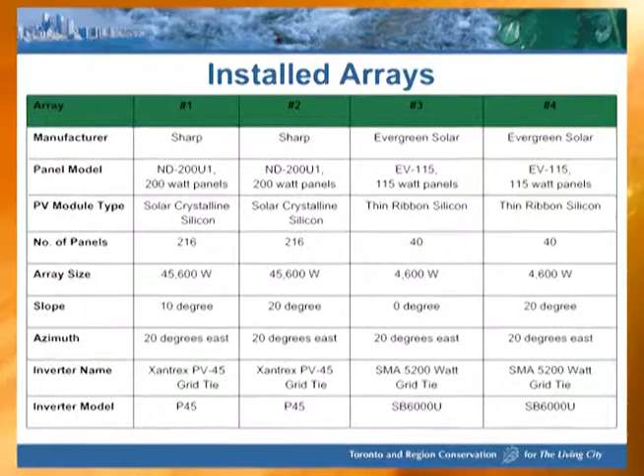This is a bit nerdy, but it's just showing that we've got 4 different systems there. And I would say systems number 1 and 2 are now a bit dated in that the inverters that were used on those do not have the kind of efficiencies that a modern inverter of that size would. However, systems 3 and 4, the inverters that were put on there are still state-of-the-art inverters. So as we go through, I'll tend to look at numbers 3 and 4 a little bit more than the first ones.

So if we look at the yields, this is the standard way that I like to look at what a system produces: the number of kilowatt hours per installed kilowatt. And this then equalizes all different kinds of systems, all different sizes of systems, together into one unit that you can look at. And so the round number that I always tell people is 1,000 kilowatt hours per kilowatt installed. And there you can see why I'm saying those numbers.

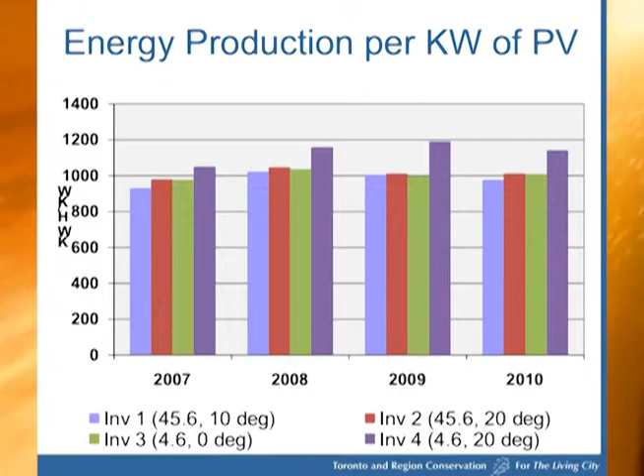Now, inverters 1 and 2, you can see they perform a little bit lower than the others, and that's basically the inverter. And you're not going to be buying that inverter now, so maybe look at systems 3 and 4. And system 3, you can see, is still bumping in a little bit below 1,000 kilowatt hours per kilowatt per year. But it's a 0-degree array. So that's as bad as it gets, basically. Generally, we tilt them up.

However, we have to remember that the fuel is free here. So efficiency isn't necessarily top dog, right? It's cost effectiveness. So if you've got a building that has zero capacity as far as weight goes to carry an array on the roof, now you have to build a superstructure over the roof. So this is, again, the Loyalty 1 example. And if you look at the cost of that superstructure to tilt the modules rather than mount them flat, it may not be the most cost-effective way of installing the system.

So this is where you're basically relying on a proponent that's coming to you and saying, we'll design a system for your roof. That's part of the little dance that they have to do: well, do we put in more? As soon as you go into an angle, now your dynamic loading on the roof happens. The modules start looking like snow fences, so they can increase snow accumulation compared to an array that's flat.

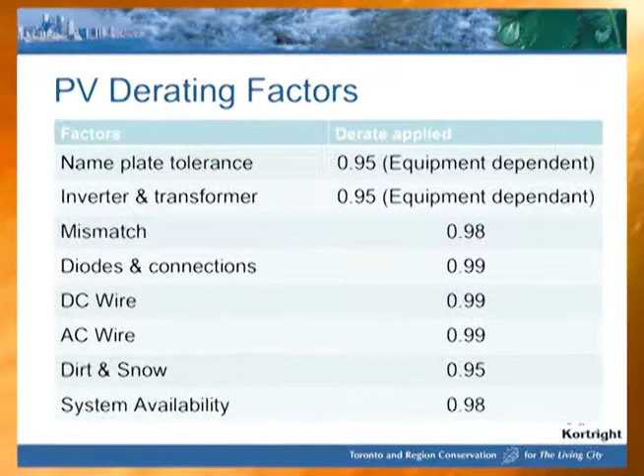So that 17%, where does that come from? If we break that 17% down, there's a nameplate tolerance. Let's say you buy a module that's 100 watts, plus or minus 5. So some of them are going to be minus 5. And the way arrays work is if you put a 95 watt module in series with a 100 watt module that's actually 100 watts, they both act like 95. And then if we put those in series with a +5, a 105 watt module, they all act like 95 watt modules. That's just the nature of the beast.

Typically on large arrays, we're putting somewhere between 6 and 10 modules in series. So you can pretty much bet that there's going to be one in that string at the bottom end of the tolerance. So you think the nameplate of the array is 100 kilowatts or whatever it is, knock 5% off there. Maybe you might get lucky and they're all +5, right? But that's not what I'd want to count on if I was trying to finance this.

The inverter and transformer, there's a bit of a loss there, changing your DC into AC. Mismatch, okay, and you kind of go, what's this guy going on about? These are 1%. That's 1% of your yield. So it's not just one small input. That means your output, what your revenue is based on, is going to be down 1%. And in the world of finance, that's a lot of money, right? So look, these are the elements that go into mismatch.

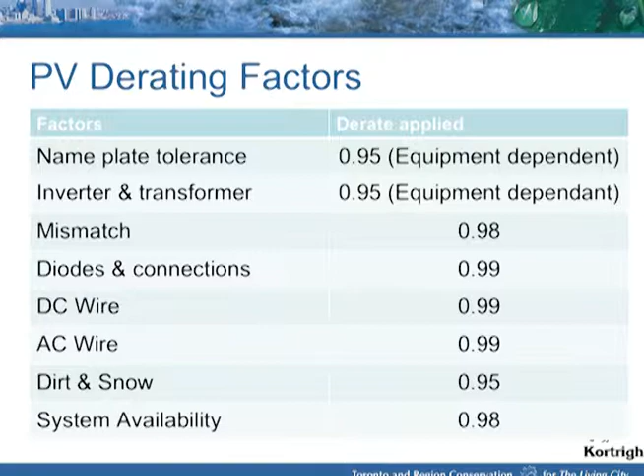Okay, they're both 100 watt modules, fine. But one of them has a power point of 50 volts, and the other one has its maximum power point of 51 volts. Well, they're both held at the same voltage. So again, we have this series element where we put all these modules together. Yes, they're both 100 watt modules, but it's at slightly different voltages. So that's where mismatch comes in.

Connections, the wiring, the AC and DC wire, and then we come into the dirt and snow. We put in 5% there. The one element to remember is the flash test is good as far as it goes. But what does the flash test measure in? Watts, right? It's a 100 watt module. What is your revenue based on? Watt hours, right? So a flash test is just that. That's how the module performs under a certain set of conditions.

So what we find is we could have, let's say, two 1 kilowatt STC, standard test condition, arrays. Their yields will vary plus or minus 5%. That's kind of the normal range between modules. So what that means is that different modules behave differently at different atmospheric conditions. So even though a standard test is 1,000 watts per square meter, 25 degrees C, at an air mass of 1.5 atmospheres, that's not where they live. They don't live on a test bench. They live on the roof of this building, which right now might be only receiving 200 watts.

Well, two modules that flash the same at 1,000 watts per square meter may perform differently at 200 watts per square meter. And so if you're in an environment, as we are, that has a lot of low light, then one module may perform better than another one overall on yield. Whereas as modules get hotter, their performance drops off. Let's say there's one that's very temperature tolerant, it's a great module to use in California. Whereas one that's slightly better at low light conditions is maybe the one that'll win in the market here.

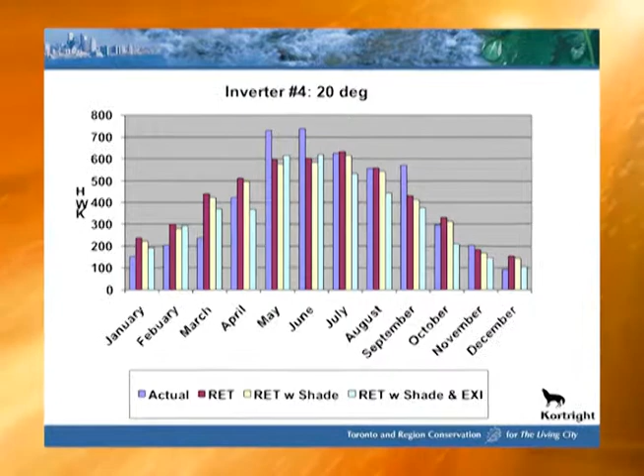So once people saw that, and I said, that's what I would have predicted for that system, they went, oh, okay, because up to that point they were beating themselves up, going, what's wrong with this system? But there it is. So you've got to have the right expectations going in, and that's where all this information about how our atmosphere matters, because those are all the inputs that we're looking for in these models. And that's how the different systems did over the year.

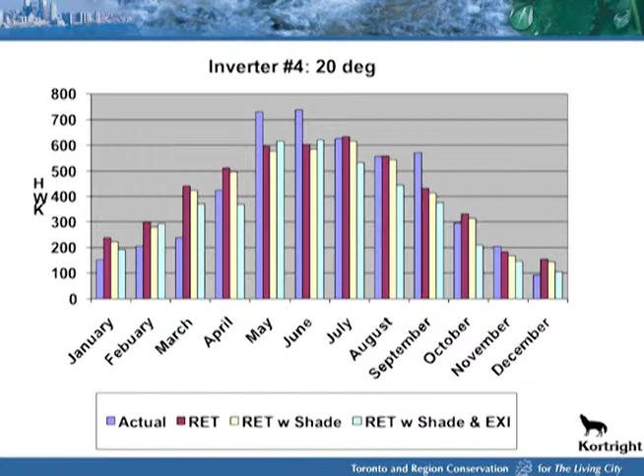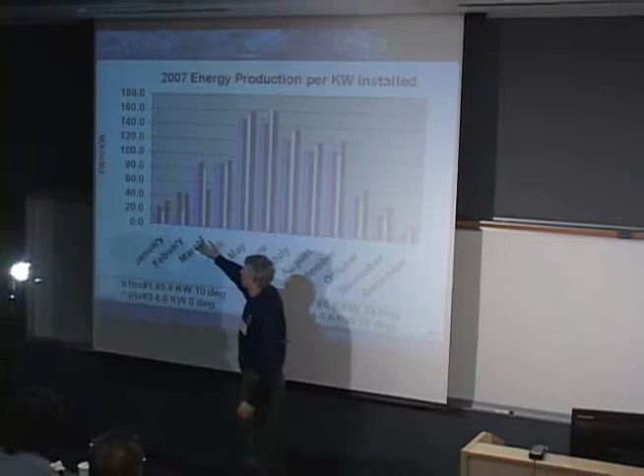Obviously, we have 1.2 sun hours in December, and we have like 5.6 in the summer. So basically, systems do 5 times as well in the summer. So that's why this shows, as much as we think our modules need to be tilted, you make hay when the sun shines. You have the modules tilted towards the sun here. Don't worry about this. Now you might have heard there's this rule of thumb that says modules for best year-round production is 45 degrees.

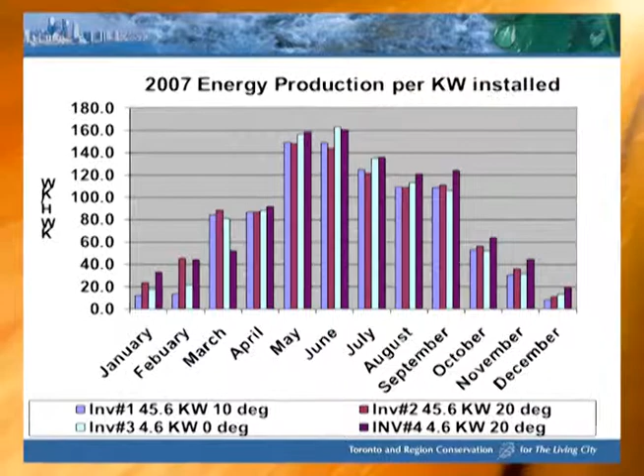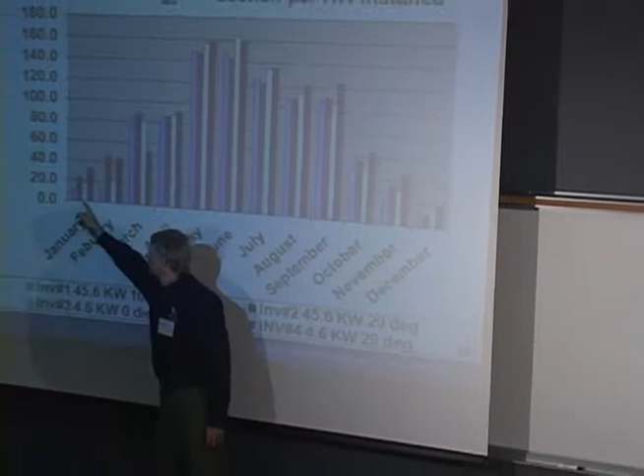That's purely a mathematical calculation that does not take into account weather, right? We're at a north latitude, and if it was clear all the time, year-round, 45 degrees would be the best. But not only do we have short daylight hours, we also tend to have a lot of overcast skies. So what happens here is not so important. It's being at the right angle for there. So that's where optimal angles are probably, for efficiency, 30. But that doesn't mean cost effectiveness is best at 30, maybe it's at 20.

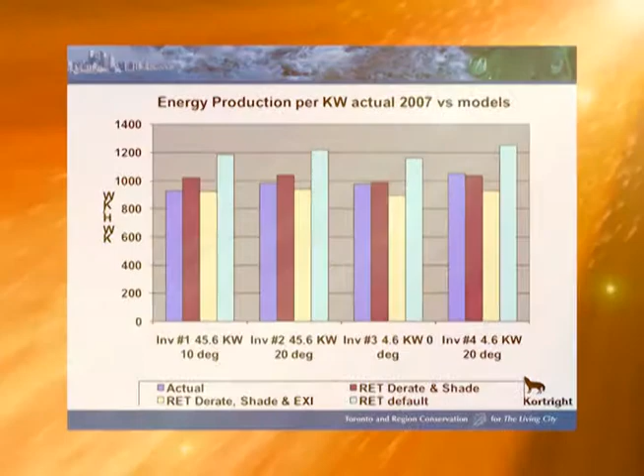On this one, what I wanted to show was that even though I put in, say, a good derate factor into RETScreen, these models still have a hard time predicting what any month's production is going to be. So you can see that what's happening here and here is opposite. So the systems tend to overproduce according to the model in the summer and underproduce in the winter.

So long as you've got a year before you need to make any decisions or before you start getting worried that your system isn't producing properly, you're okay with that. But quite often, if you've just put down a chunk of change, after the first month of production you want to know how the system's doing. Well, unless you're using a slightly more intelligent model, unless you're here or here somewhere, the model will be either over or under predicting what should have happened that month.

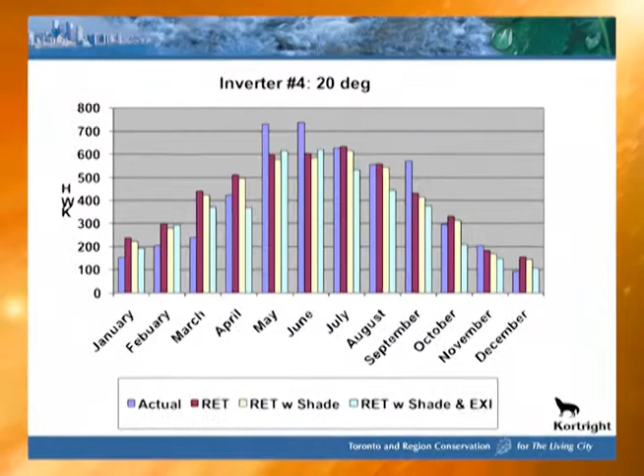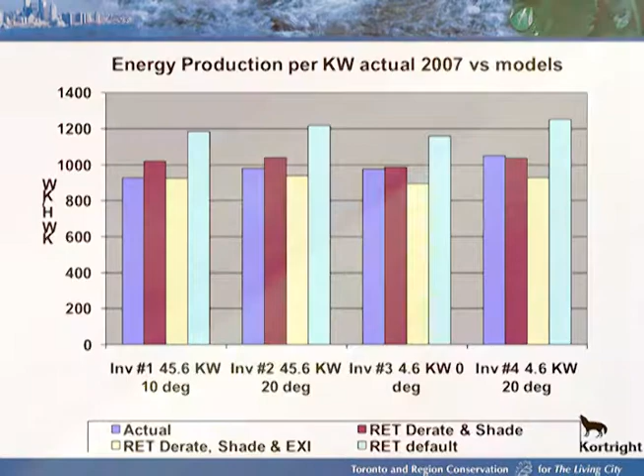Local installation, what really happened? Okay, I've got an array and I've installed it and I used a good model to predict, and let's say I'm 10% low that first month. Is something wrong? So the question is, okay, my model is built on a 20-year average. What was the sunshine like in the month that I'm looking at? So if you've just commissioned a system, you're looking at your first months of information, and you're over 10% or under 10%, that's about the range it'll be. That's the normal variation for the 20-year average.

So you now need to know how much sunshine was there in the last month, and how does it compare to the 20-year average? So what I want to do is have some on-site pyranometer to measure how much sunshine landed on my system, and then I can know where I land. Was this an average April, or was this an above average April? Well, if it was an above average April and my system is below average performance, what happened? And so what you want to do is have that on-site pyranometer.

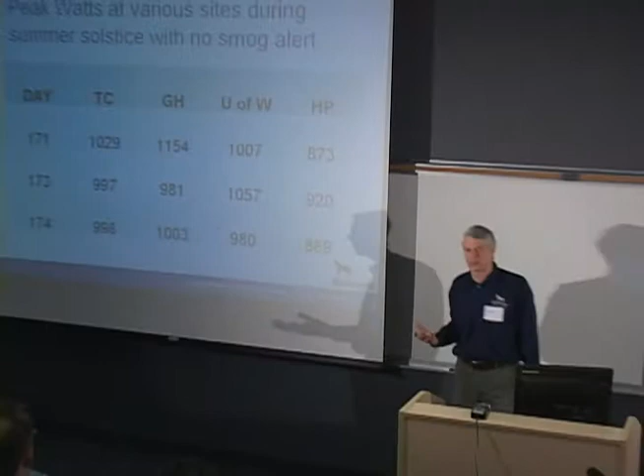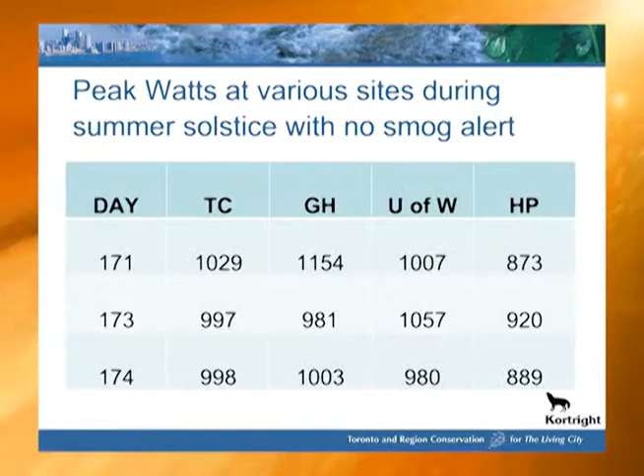Now, unfortunately, this is Horse Palace. This is what a $300 pyranometer will do for you. And this is what a $3,000 pyranometer will do for you. These all agree with each other, and this guy's off. You would have thought that we didn't have very much sunshine, and that's why the system didn't produce very well. So unfortunately, it's not highly informative to put relatively cheap instrumentation on site for every site. These can be good, or they may not be. They tend to wander around a little bit. And it can cause alarm or euphoria where it's not warranted.

You go, woohoo, the system's doing great, and we had plus 10% over the 20-year average. It's a wonderful system, I'm gonna make a killing. Where really it's just not a very good instrument. So that's why one of the projects on the Solar City assessment, and you'll start seeing reports on a monthly basis on that site, is we've started up a network within the GTA of all of these instruments, and they're all going to be posted. So you, or your vendor, will be able to go there and go, aha, it was a perfectly normal April.

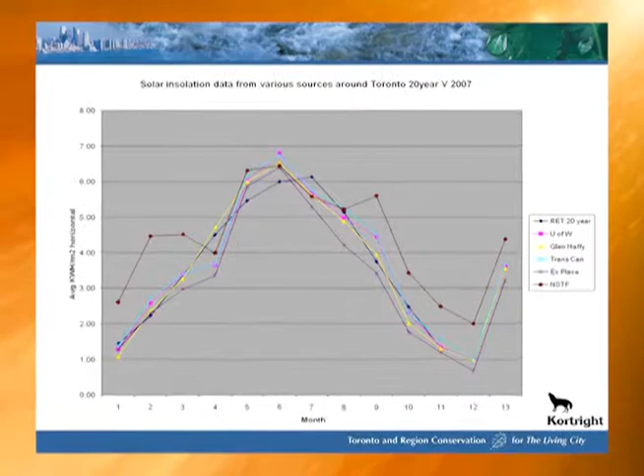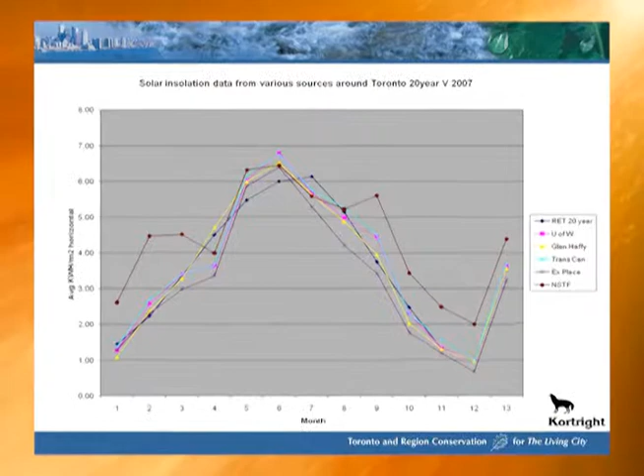So this is, I think, now your question. If we look at the RETScreen 20-year average, that's that nice dark blue line that is kind of on its own. It's right there in the middle, and it has a nice bell curve to it, which is the sort of thing that happens when you do averages. You get nice smooth curves. However, we can see what the year really did. This month, we're totally below average. I would say this is a very normal month. It's just below the average. And when we look at the statistics of these things, that's well within the norm.

Plus or minus 10% for any particular month is normal. Just like rainfall, plus or minus 10% rainfall, the same thing with sunshine. But you know what, it's kind of neat that you kind of go, hey, the planet kind of has this correcting factor. Because if you go along to month 13, I like to call it Sunuary, this is the yearly average. So this isn't a real month.

Over the year, we tend to end up on the 20-year average, year after year after year. So just because I've got an underperforming system here doesn't mean I should get all excited and say, hey, I want money back. The weather systems tend to normalize themselves: if it was a rainy spring, it's a sunny summer. So if we've got a year to sit back and let the numbers pile in, we'll generally find ourselves always at this point.

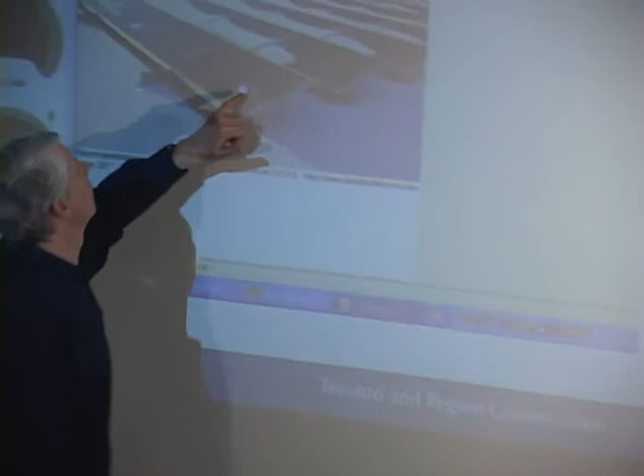So these are a bunch of sites where we're doing studies. One of the inputs that is not typically done is an obstruction or shading analysis. This is a fairly old instrument, but I like it because it makes it very visual. You can see that there's a chimney here, and that's going to shade that part of the array for certain hours of the day of certain months of the year. And then there's the Ex Place array, and you can see these points here demarcate where I used the instrument. I used it at the four corners of this section of the array, and that's where it picked up that flagpole and that chimney. So we just have that as an additional input.

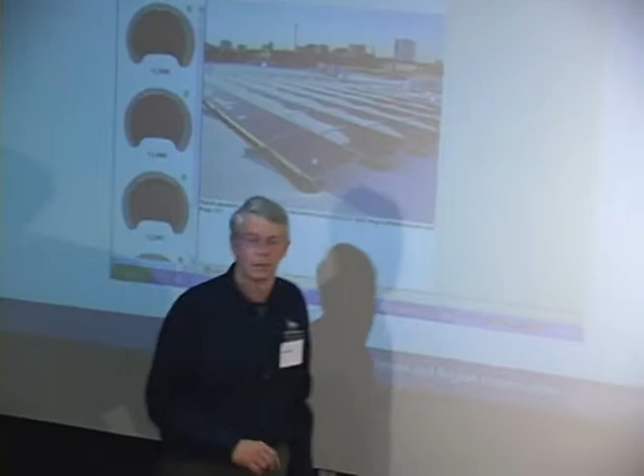Now, a lot of people will go, well, I actually have no obstructions. There's no chimney and there's no flagpole. But everybody has a horizon. My solar radiation instruments are on a pole in the middle of a great big field, right? So that's how we take the measurements. You go, well, there's just buildings around me. Well, let's say they take off 0.25% of the sunshine. That's 0.25% of your yield. It's 0.25% of your income. And when you look at financials, that's the kind of number you look at. But on these models, people tend to go, well, it doesn't matter, it's only a little bit. But no.

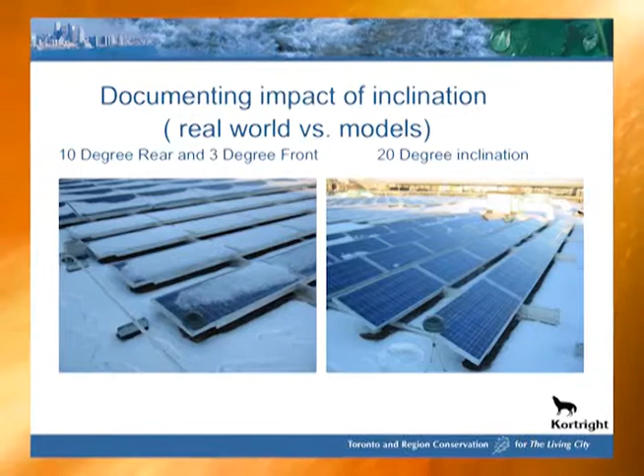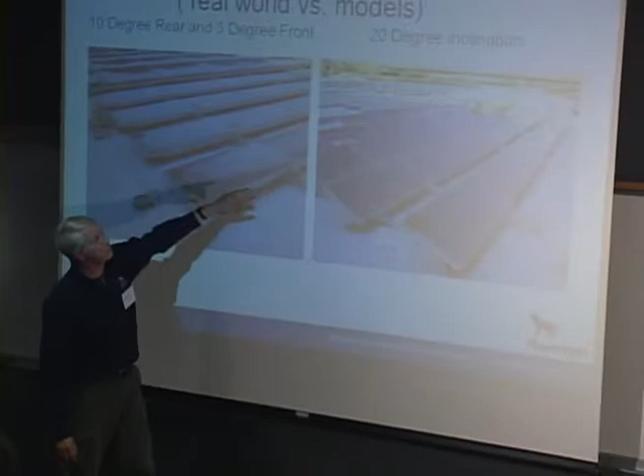Here in the back, you can see a 10 degree here, a flat array here, and a 20 degree there. This will tend to sit like this all winter, in fact be buried. Well, this one will tend to clear itself. That's the kind of thing that models don't take into account. And it's a very regional thing, how does the snow fall and hold on to different angled arrays in the GTA.

And so what we have at Kortright, and this was going to be a time-lapse photography, but I guess this computer doesn't read it, is we have arrays at 0, 10, 20, 30, and it goes right across to vertical arrays, and we're taking actual numbers off of these. So that will again be inputs that are available to you and to people in the industry to make predictions as to what yields will be on different angles.

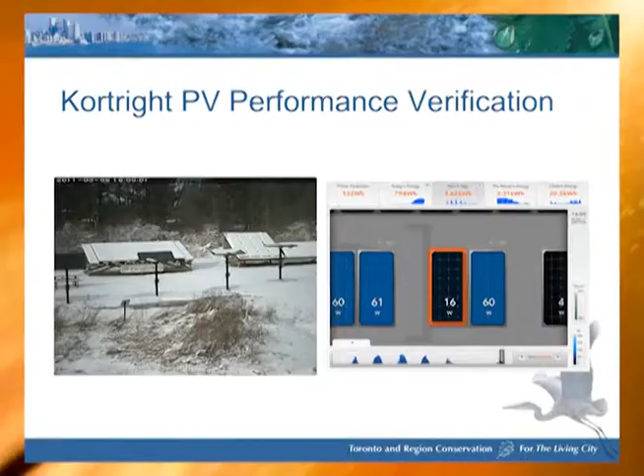Now, here's two images at a certain timestamp, and what you can see is the 0, 10, 20 degree array has shed its snow except for this one little bit. And this isn't so informative as far as snow goes, but here is my data for those two modules. At this point, this one is producing 60 watts, this one's doing 16. That much shading basically shuts down the module. So from an inter-row shading issue, from a flagpole, from a chimney kind of issue, that's the sort of impact that shading can have on modules.

So we almost come to the end here, and yeah, I'm doing pretty good.

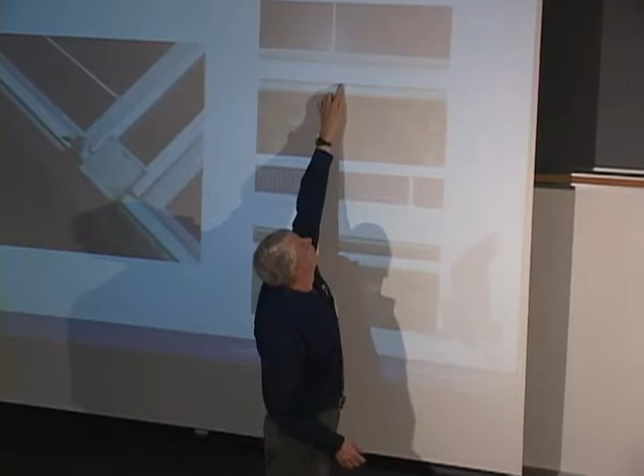And you can see this is the ballast on the roof, right? Just the gravel. That's the rack, and that's the module. No gap. In the lower picture, here's your ballast, here's the rack, here's the module. Whoops, there's a space. So it just happened to be that these modules in that racking system caused the module frames to fill with water and split. So on the one hand, there is risk. After we saw that, they had to go around and drill some drain holes in there. Problem solved. They replaced the modules that had been damaged. Just bringing that up as there's risk every time you change the technology.

So as you're looking to vendors, what was your last system? I know it's a new industry, and a lot of people don't have a lot of experience. A lot of the vendors won't have put in a lot of systems. But in my evaluation, I'm going to give some weight to vendors who have some experience, and in particular some experience in the technologies that they're installing on your system that you're financing, that you're going to own. So that's just a word of caution on the one hand.

On the other end, under risk management, all renewable energy technologies basically fix your energy costs. So in a way, they take away risk, right? As much as I know the FIT program and PV is doing great these days, look at all the solar wall, solar air heating, the solar thermal systems, and think of that as you evaluate those technologies. Essentially, every time you spend capital to harvest energy, you're fixing your energy costs into the future.